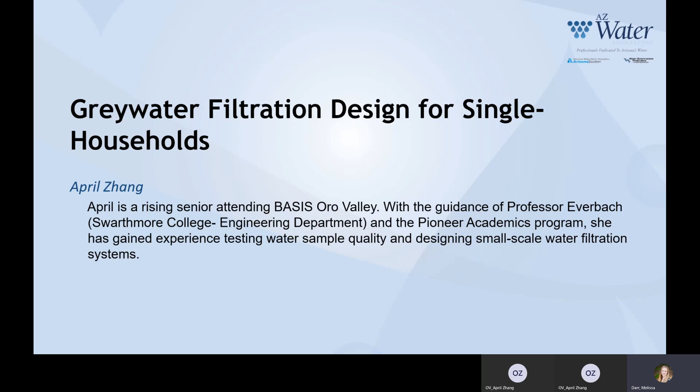So water scarcity has always been a prominent issue in arid regions such as Arizona. And recently, there have also been growing concerns regarding the Colorado River drying up. So this has a direct effect on the water levels of Arizona's Lake Mead and Lake Powell, which have reached historically low reservoir levels. And then in addition to this, this summer we have been continuing to experience some of the highest temperatures. So excessive heat warnings have become a very common weather report.

And one solution to this problem of water scarcity is greywater. So greywater is water without fecal contamination that is recycled for purposes like irrigation and toilet flushing. So basically water from your kitchen or from your laundry machine.

So when greywater is reused either on site or nearby, it has the potential to reduce the demand for a new water supply and also reduce the energy and carbon footprints of existing water services, and then meet a wide range of social and economic needs as well. So the reuse of greywater can really help to reduce the demand for more costly, high-quality potable water. Next slide.

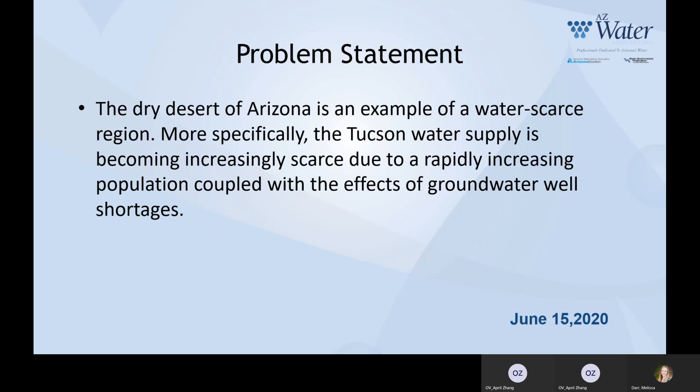So here, figure 1 illustrates the volume of water in acre-feet that Oro Valley receives from reclaimed water, groundwater, and CAP water. So CAP stands for the Central Arizona Project, which is basically referring to the canal that connects the Colorado River to central and southern Arizona.

So if you look on the graph, you can see the amount of reclaimed water, which is shown in purple. It has been increasing dramatically since about 2005 to 2006. So this indicates that communities have become much more accepting towards the reuse of greywater. And then another thing to note is that if CAP water declines, so if the water coming from the Colorado River does decline, this could be made up by reclaimed water. And then this will also address the problem of demand for water going up as production increases, because we are having a population increase in Arizona.

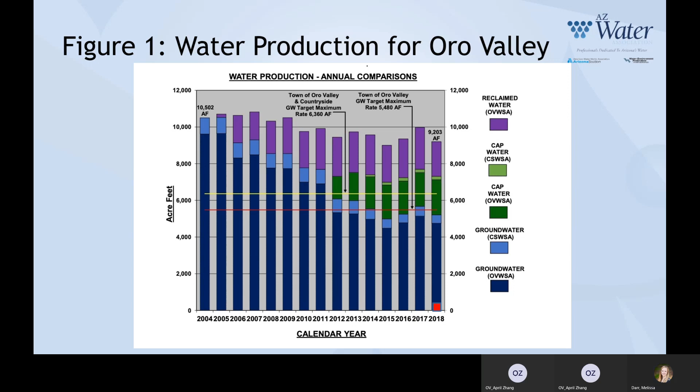So this filtration system could save around 110 million gallons of water annually, and this is approximately 337.5 acre-feet. So on the graph, it would look like this. So if you click forwards, this small red rectangle in the 2018 bar in the very bottom right, that would represent the 337.5 acre-feet. So in reality, this is only a small dent in water production because the filtration system only considers single households and not things like private industry or businesses, etc. Next slide.

So to target these concerns and to present alternative options of water reuse within individual households, I have designed a cost-effective greywater filtration system for local Tucson households. And of course, this filtration system is not restricted to just the Tucson area. The design can be modified for households in any region. But it's a good thing to note that this design does utilize the greywater filtration design base that is recommended by the City of Tucson.

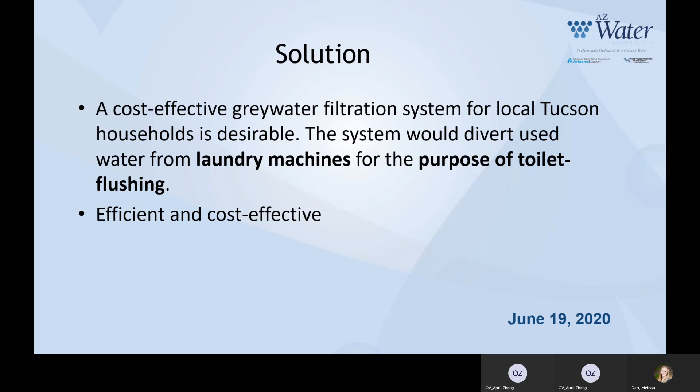So essentially, the system will divert used water from laundry machines for the purpose of toilet flushing. And this is really useful because we don't always require the highest quality potable water for something like toilet flushing. And then if implemented on a mass scale, this greywater filtration system would not only provide an efficient method to help conserve water, but also offer homeowners a path to lower water bills. Next slide.

Okay, so before we jump into the design, I want to go over the quality of the greywater. So I sampled 5.7 liters of used laundry water from a top-loading washing machine, and then left that in a plastic bin for 24 hours undisturbed. And then after that time, I found there was a thin layer of foam and detergent on the surface of the water. And then I'll address this later in the design.

And then I also conducted a dissolved oxygen test on the greywater samples from the washing machine using the Hach dissolved oxygen test kit. And there's a picture shown on the right here. So dissolved oxygen is a really good proxy for pollution, especially organic pollution.

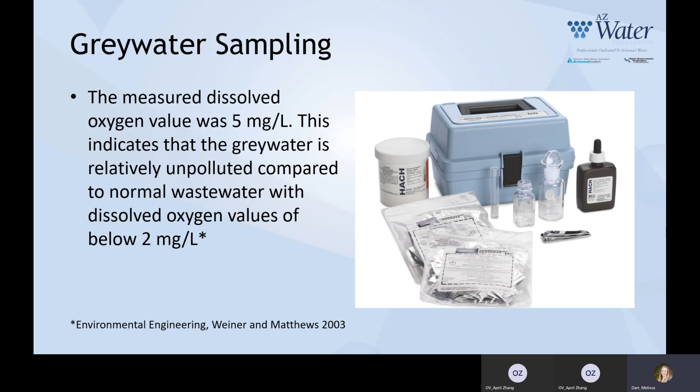So if you have a higher dissolved oxygen value, it indicates that there's less bacteria in the water because there's less food for the bacteria to eat, so they're not using up that oxygen as quickly. So after I conducted the dissolved oxygen test, I got a value of 5 milligrams per liter, and this is relatively unpolluted compared to normal wastewater, which usually has dissolved oxygen values under 2 milligrams per liter. So this indicates that the used water does not require a very intensive filtration system.

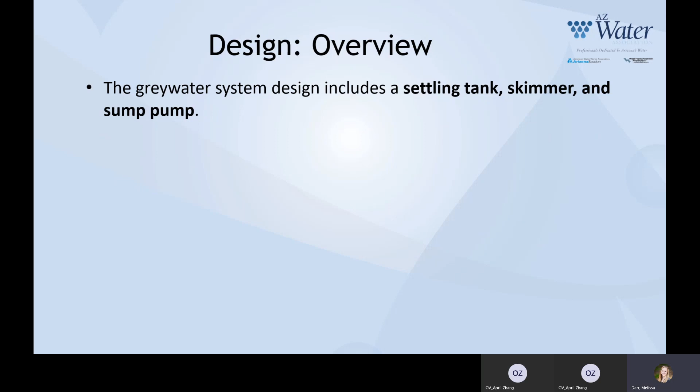Next slide. So design overview. So this filtration design has 3 main components. You have the settling tank, the skimmer, and the sump pump. So if you click forwards once. Yeah, so the settling tank will be the main storage container for the laundry water. So after the water has been diverted from the laundry machine, it will go to the settling tank.

And at the bottom of the tank, there will be a tray, and there's going to be small rubber fibers that protrude upwards. And these rubber fibers will help the debris settle and cling to the tray better. And then I'll go over each of these parts in more depth later in the presentation. If you click forward once more again. Yeah, so the floating skimmer will run across the water in the settling tank, and it's going to remove the top 1 centimeter of grease and detergent that was observed before.

So an important thing to note here is that the floating skimmer is going to move back and forth across the water, and it's floating, so it's resting on top of the water surface. So for example, if the water level is higher or lower, the floating skimmer will be able to follow the changing water level. And then click forwards once more. The sump pump will use a pressure-sensitive mechanism to pump water to both downstairs and upstairs toilets if need be.

And then again, this design may vary from household to household, considering the volume of water used for laundry and toilet flushing. And then additionally, the sludge or the debris that's collected at the bottom of the settling tank can be reused as plant fertilizer. Next slide.

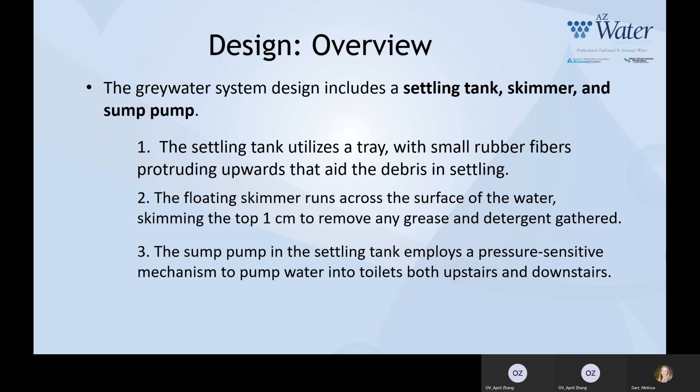So at the start of the greywater treatment system, the greywater will be diverted from the laundry machine. So it has to be diverted from a pipe that usually goes to sewer to a pipe that goes to the filtration system. So laundry machines typically have 3 tubes that protrude from the back of the machine. So 2 of them are bringing water to the machine, both hot and cold water, and the last pipe carries away the wastewater to the sewers.

So here, at the junction where the wastewater would usually enter the sewers, there would be a 3-way valve. So this 3-way valve will basically divert the water to the settling tank. And then a 3-way valve is useful because it also allows the toilets to be supplied by either regular potable water or treated greywater. So in this design, there will be 2 3-way valves. One will be at the junction where the wastewater will be diverted to the settling tank. And the second 3-way valve will be near the toilet, where the homeowner can choose between flushing the toilets with the treated greywater or the potable regular water.

So this valve also acts as a safety net for any problems that will occur within the greywater filtration system. So for example, if there's a problem with the system, the homeowner will still be able to switch that valve and choose to flush their toilets with regular potable water instead of the treated greywater. And then this design will utilize PVC pipe. It's ideal for this design system because it greatly reduces material costs. And then furthermore, the water being drawn through these pipes will not be consumed, so the PVC pipes really pose no health hazards.

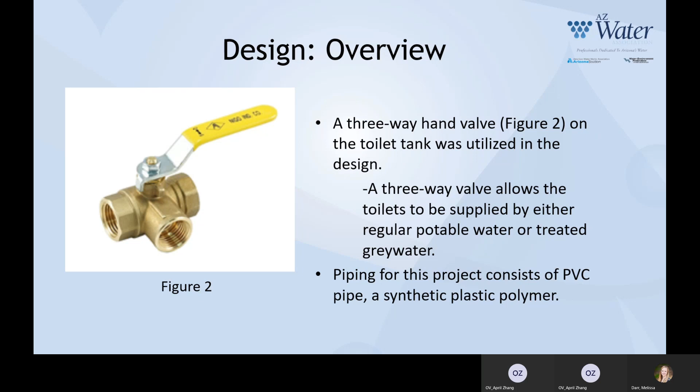So holes can be drilled into the walls, and then the PVC tubing can be fed through to the desired locations if you would like to install this design in an existing house. Okay, next slide.

So in the first part of the filtration system, the water will undergo a process called settling. This is basically where the large debris and particles are able to sink to the bottom of the tank, leaving the majority of the water clear of any major debris. I estimated that a 100-gallon plastic water tank will suffice for a single household. But the capacity of the settling tank may need to be modified according to the amount of water used for laundry and toilet flushing for that specific household.

And then if there's a chance that the water tank does not meet the carrying capacity required, you can install an emergency pipe to the side of the tank that will transport all overflow water back to the sewers if need be. And then attached to the bottom of the settling tank is a plastic tray with rubber fibers that protrude upwards that will help the debris cling and settle better to the tray and remain undisturbed. This tray should be sized according to the width and length of the water tank. Next slide.

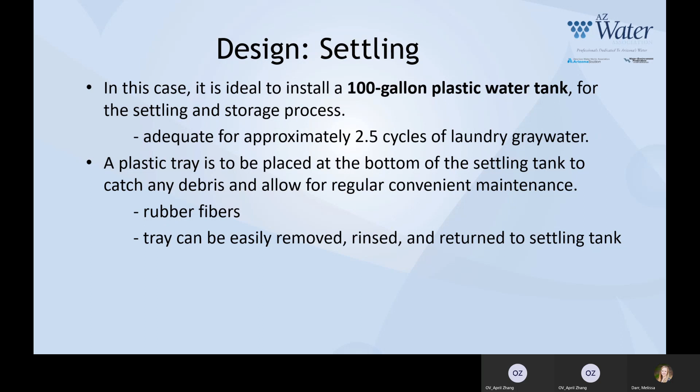Okay, so another thing to note is that there will also probably be an excess of grease and foam from the laundry detergent that remains on the surface of the water, like I observed when I sampled these 5.7 liters of greywater initially. So to remove this top layer of debris, we have designed a skimmer. A skimmer is basically a piece of metal that is suspended above the water surface, and it's supported by any two kinds of flotation devices, so foam or anything like that.

And this will allow the skimmer to hover over the water surface and then scrape away the top 1 centimeter of debris. This device will move back and forth about 2 to 3 times, and then any debris that is scraped off is deposited into a tray at one end of the tank. This side tray will also be supported by any 2 types of flotation devices. So this tray obviously requires regular maintenance to dispose of the debris.

And then the skimmer will be powered by a motor connected to the sump pump's motor. So for instance, when the sump pump is activated, it will initially activate the skimmer. The skimmer will first skim the top of the surface of the water, and then the sump pump will begin to pump the water to the toilets. Skimming the water surface when the water is undisturbed allows for maximum efficiency to get rid of all of that grease and foam on the top.

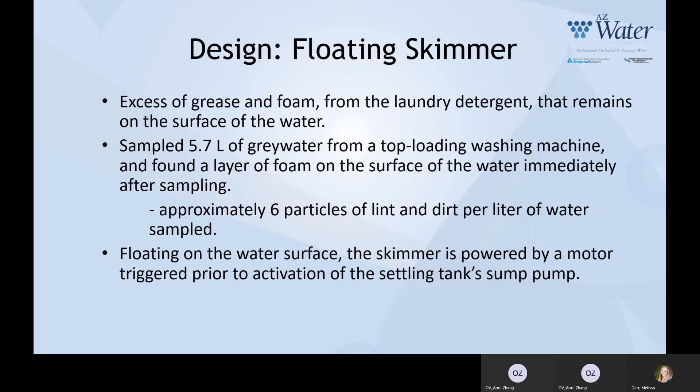And then there will be a 10 to 15 second delay between the initial activation of the sump pump and the water filling the toilets, and this is ideal. So when the sump pump is activated, the skimmer turns on afterwards, similar to a chain reaction. For this, a relay can be utilized. A relay is basically a switch that controls one electrical circuit by closing or opening contact with another. Next slide.

Okay, so the final component of the design is the sump pump. The sump pump functions very similar to a regular water pump, but the distinguishing characteristic of the sump pump is its pressure-sensitive mechanism. To explain this in more depth, when the toilets are full, the pressure in the pipes will build up, which will signal the sump pump to stop pumping water into the toilets. And vice versa, when the toilet has just been flushed, the pressure in the pipes will lower past a specific pressure, and this will signal the sump pump to begin pumping water into the toilets.

So the sump pump will use the toilet's built-in mechanism when providing water. When the water drains into the toilet bowl, the inlet valve will open and close based on the pressure exerted by the float ball. Thus, the integral system of the toilet is not modified.

And going into the numbers a little bit, the main characteristics of the pump would be a maximum output pressure of 3.5 psi, and this was found by multiplying the density of water by the gravitational acceleration constant and the maximum height of the upstairs toilet. So once the output pressure falls below 3.5 psi, the switch activates the motor pumping water into the toilets.

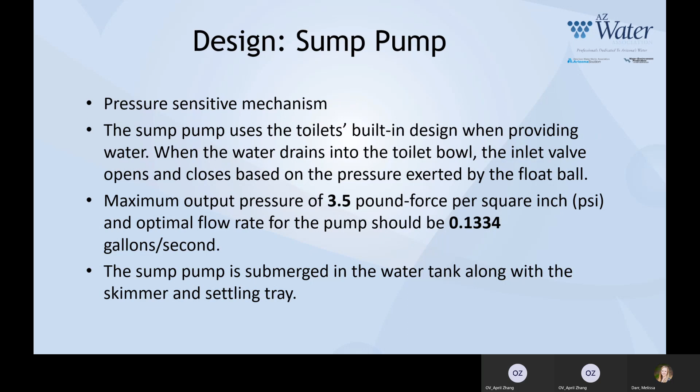Next slide. Okay, so this is just a more comprehensive diagram so you guys can better understand all these words that I'm throwing at you. So here, once the water exits the laundry machine, it will encounter the three-way valve where homeowners can choose to send that laundry machine water to the sewers or to your system.

So once it is diverted to the Greywater filtration system, it will enter the settling tank, and then the larger debris will settle to the bottom of the tank. And you can see there's some rubber fibers protruding from the bottom of the tray. And then this tray will be very easy to clean, to remove. It will have handles, although these are not depicted in the diagram.

And then the skimmer, you can see, is the gray rectangle floating on the surface of the water. So that's going to move back and forth across the water, getting rid of all that grease and detergent that has built up there. And then that debris will collect in the side tray. And then the sump pump, you can see, is submerged in the settling tank. So this design is a super condensed design, so it won't take up a lot of space.

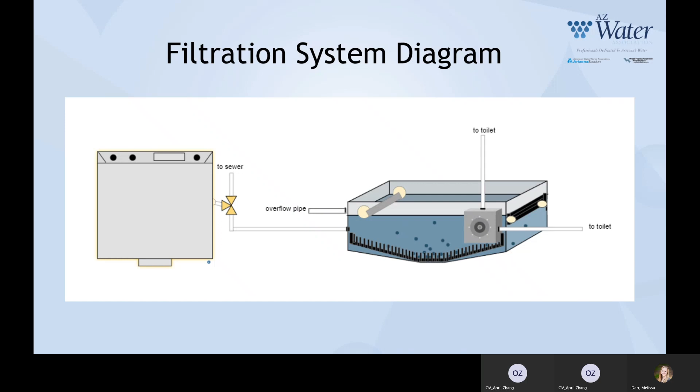Next slide. Okay. So in a super brief cost analysis, the material cost for this Greywater filtration system is anywhere between $300 to $600, excluding labor costs. But this system will be relatively simple to self-install.

So currently the dollar price for water in the Tucson area is anywhere between $2 and $6 for every 1,000 gallons. So because of this, there have been no super strong motivations to install Greywater systems. But now the city of Tucson has begun to provide a 25% tax credit for the cost of installing a Greywater system.

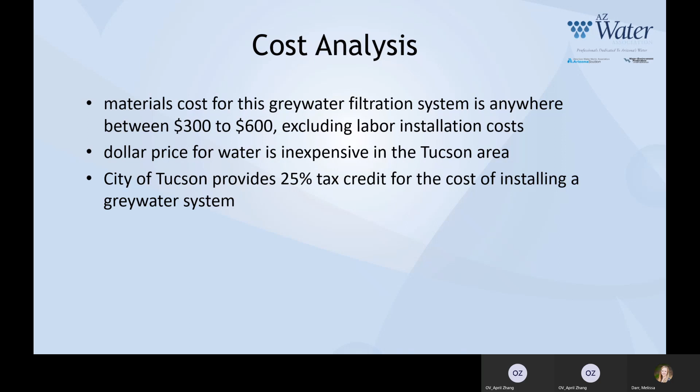Thanks, April. I do have a few questions. How do you plan on commercializing your filtration design? Okay, so this is a really good question. So I plan on working with my local Tucson construction companies in the development of new houses to help popularize my filtration design and then begin installation in homes under development or homes undergoing remodeling. Another option would be to propose this design to the city of Tucson or local governments as a recommended design for a Greywater filtration base, and this will also help to commercialize my filtration design.